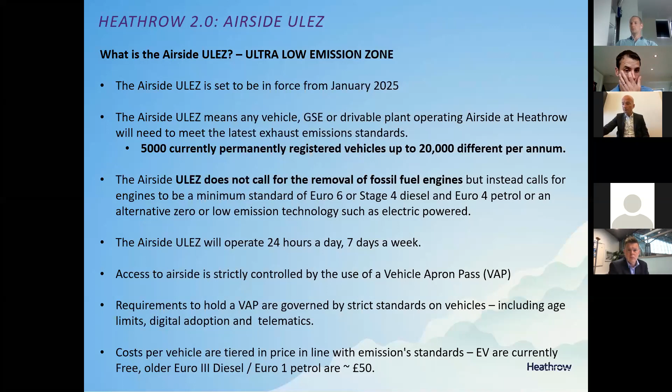For us at Heathrow, even looking at our own fleet, there's such diversity in what we do. We've got 439 of our own vehicles, 60% of which are owned, 40% are leased. And they range, like most airports, everything from a precinct sweeper to a light vehicle to light vans, through to specialised vehicles like de-icing trucks, glycol recovery trucks, rubber removal, as well as the fire service vehicles that we have.

We've been working towards ULEZ and having a target of emissions since the end of 2014, when we first published that we were aiming to have an ultra low emission zone. Part of that drive for us was that our vehicle age limits suggest no vehicle shall enter the airport for the first time over 5 years old, and general vehicles should not be more than 10 years old when at the airport.

There are some exceptions for very specialised pieces of kit, which can go up to 15 years. So generally, the 10-year lead into ULEZ was going to give all of our service providers and partners the opportunity to rethink their fleet strategies, so that when we got towards 2025, their replacement strategies enabled them to be ULEZ compliant in advance, rather than waiting for the last minute for big investment decisions.

From a Heathrow perspective, out of the 439 vehicles, 164 are planned to be switched to electric or hybrid by the end of 2020. These are supported by 108 electric vehicle points and 20 advanced charging units as well.

This still leaves a big challenge of 275 vehicles that are currently not ULEZ or fully ULEZ compliant electric vehicles. Of those 275, a predominance are our specialised kit, such as HGVs, snow equipment, fire vehicles. But like in the industry, we've been having long discussions with a lot of our partners and suppliers, such as Vestergaard, about how we can introduce cleaner vehicles and electric vehicles into our fleet of airports. We really recognise the development costs this has for our supply chain in manufacturing and developing these vehicles in the first instance.

As well, there's the cost for vehicles not owned by Heathrow - how much it costs for our stakeholders, partners, service providers and ground handlers to actually purchase this equipment. So 275 vehicles is our remaining challenge. Good news for us, 178 of those do comply with the actual ULEZ standard, meeting the Euro 6 for diesel or Euro 4 for petrol standards already. So really the big challenge out of our 440 vehicles is trying to find a solution for the remaining 100 vehicles.

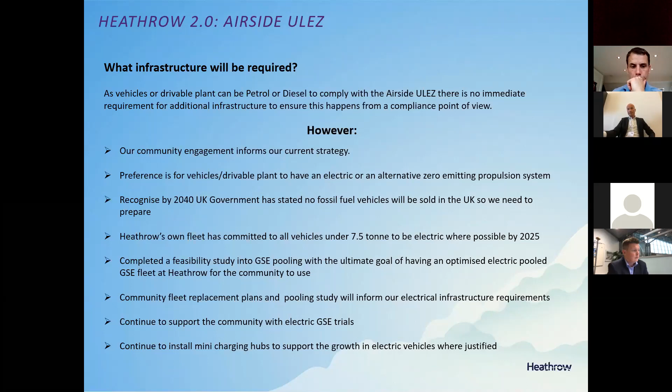So for us, what are going to be the challenges as we move towards 2025? Five years ago, when ULEZ was 10 years away, it seemed a really long time, and now, five years on, the horizon seems to be coming at a more rapid pace. I think personnel and airside operators are changing very quickly, and we need to maintain regular communication as the whole network of suppliers, service providers and personnel changes at the Heathrow environment.

The physical equipment, the electric vehicles and GSE, is rapidly evolving, and installing infrastructure to support the trials is a really complex process requiring funding approval, power availability, underground surveys and construction lead time. Heathrow is not a greenfield site like many airports, so it's not simply a case of finding the electric charging unit, putting it above ground and plugging into it. Frequently, the general supply of power is going to be a challenge. So some outlooks suggest it's going to be tens and tens and tens of millions of pounds just to supply sufficient electrical infrastructure to power enough units to deliver this.

Lifetime costs are really challenging. Most electric GSE is currently more expensive than the fossil fuel equivalent - sometimes you can pay double the cost for an electric vehicle compared to the fossil fuel equipment. However, running costs remain in favour, with diesel being cheaper than electric. So making sure funding is available when looking at replacement costs, especially with current liquidity issues across all businesses, choosing a vehicle that's 50% more expensive than another for practically the same function is going to be a tough thing to do.

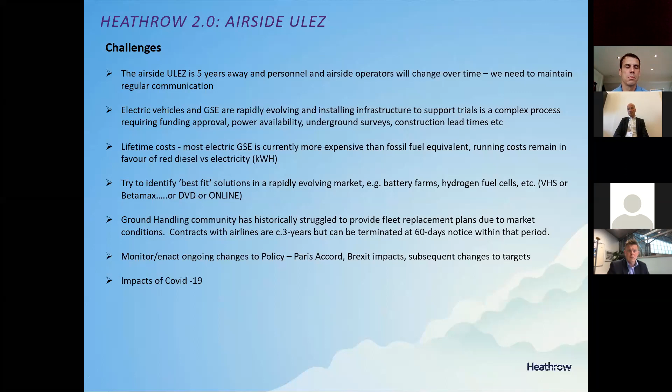There's not one person currently in the aviation market that has escaped the impacts of COVID-19. With many airports operating at less than 20%, 10%, some even 0% of their normal capacity, they're really struggling to generate the income to keep them as a liquid, viable business. For them to try and generate the right revenues to stay afloat, let alone get replacement vehicles, let alone those that are potentially more expensive, is a really, really challenging market. So it's continue to watch this space.

Data is a big thing for us in how we are going to achieve ULEZ. In order to obtain vehicle apron passes, people do have to apply. Until last year, whilst we did have an electronic database of all vehicles, we had no way of accurately generating where we were in terms of compliance for ULEZ, not just for ourselves, but also the whole market in terms of the supply chain and every single one of those 5,000 vehicles that needs to have a vehicle apron pass. Likewise, we had no direct data on when we were expecting the vehicles to be replaced according to our age restrictions.

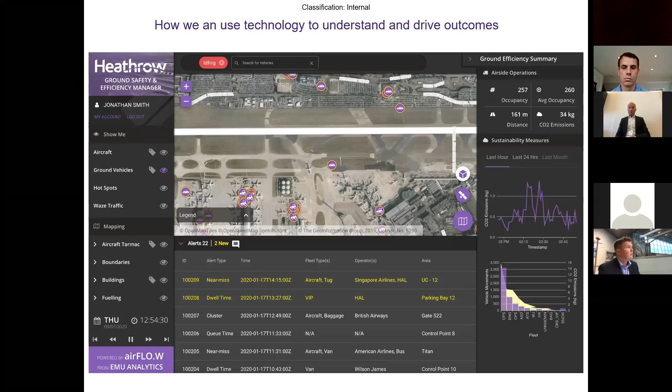And just as a sign out for me, in terms of the summary of how we're going to achieve the ULEZ - data from an internal perspective is going to be key and has been key for us. Gathering the data from telematics, looking at the detail within our vehicle apron pass ID gateway systems, and drawing upon all those other data and dash cam technologies to provide as much data as we can. Using that data, turning it into real information to understand what the uses are.

Making a reduction, first of all, making a big reduction on the journeys we're making, seeing how we can turn that information into making sure vehicles aren't idling, and incorporating that data into strategies to drive down the use of those vehicles.

From an external perspective, we engage. We make sure we speak to our stakeholders, our service partners, and our suppliers to understand their current status and keep on top of discussions about their strategies for replacing fleet vehicles with greener equivalents, understanding how we as an airport authority can help them achieve that, including infrastructure and budget requirements.

We continue to look at the broader data strategy to see where that makes a difference. At Heathrow we also look at a volume of joint forums, working with external forums such as this one. We also have our own clean vehicle partnership and center of excellence, pulling in the lead people accountable in each organisation to get senior sponsorship for joint initiatives and joint funding for implementing efficient decisions at Heathrow.

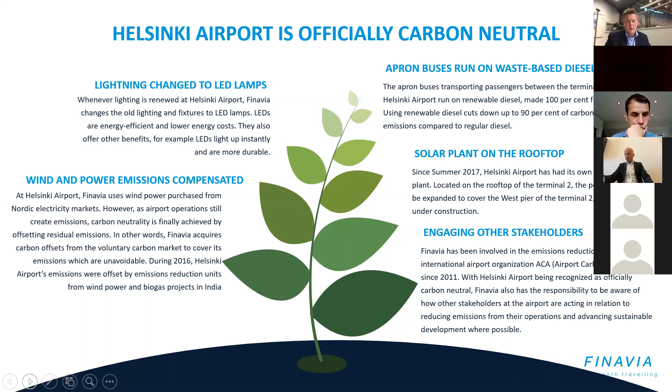Oh, we went 1 to 4. Let's roll back.

I just try to brainstorm how the airport can help the stakeholders, such as ground handling companies and other companies - catering, cleaning, maintenance - go there, so enabling the environmental initiatives. We should be clear on the communications and goal setting, creating an environment with the proper aspirations for how we want to drive the desired change. Directly linked to that is to research together and find the low-hanging fruits, and maybe not so low-hanging fruits, where emissions could be cut, and establish ambitious but realistic plans for short and long-term initiatives.

Planning the infrastructure is usually driven by the airport, but we shouldn't forget the stakeholders. At least here in Helsinki Airport, we try to listen closely to the requirements, desires and wishes of the stakeholders - where they are going and what kind of equipment they are going to have in the near future.

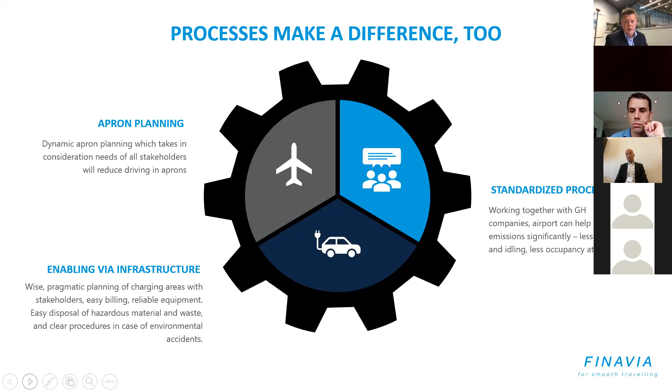We at Vestergaard are also seeing a huge impact of this COVID-19, and part of what we are looking at as a positive, if we need to see light at the end of the tunnel, is to go sustainability. So we're focusing basically all of our efforts on sustainability and the green agenda.

We see, if you look at this, what we call completing the cycle. We spray, but then we're able to recover, recycle, transport it back to where we need it, in-truck manufacture if we want, and then we can spray it again. So basically the idea of spraying on Monday, picking it up, recycling, and spraying it again on Friday. So we are trying to tap into some of this idea that both Neil and Yanni have talked about so far. How can we as a supplier be part of that?

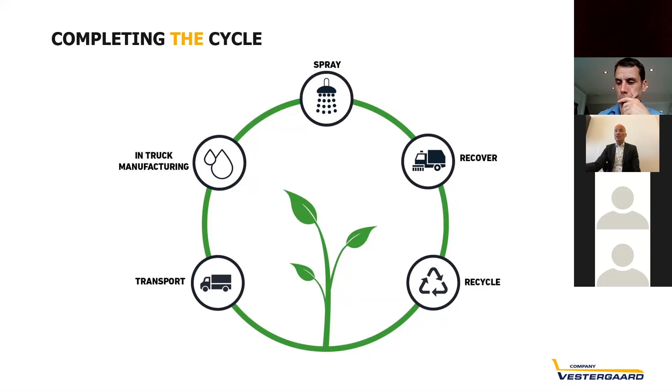So if we go to my next slide, Alice, then Vestergaard has actually set up what we feel are rather ambitious goals in our own corporate social responsibility. We want to go zero incident by 2030.

And zero incident really means everything from small accidents - people should not be injured while at work in an airport. We should have no trucks or vehicles running into each other. We should have no trucks running into aircraft. We should have no aircraft having incidents. And that also goes into some of the technology that we still at this point do not even know, like ice detection or contamination detection. Once we have that, we can go automation, robotic. Then we think we are in a totally different way than the type of operation we're doing today.

And then the other angle of our CSR is carbon neutral ground handling by 2030. So that's just over nine years away that we want to be totally fossil free. We already have several initiatives going right now that are part of this, but from now until 2030, we aim to go all the way on that.

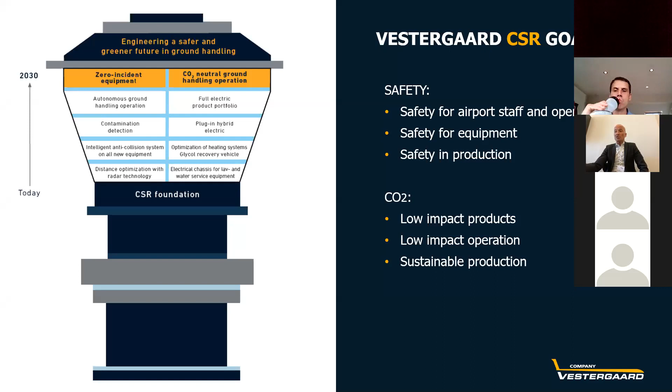Some of the first parts that we have done - Alice, please switch again - is to take our big Beta de-icer and turn it into, at this point, a hybrid electric de-icer.

It started out just being called hybrid because it's basically a Volvo that has a generator, then a battery. But particularly for the Chinese market, they want electric only. So now it's an electric de-icer with a range extender, and the range extender at this point happens to be a Volvo engine.

With this, you can actually drive around the aircraft. You can de-ice up to 15, 20 aircraft. So I'm tapping into this - no idling, no equipment standing around emitting on the apron or in the airport as such.

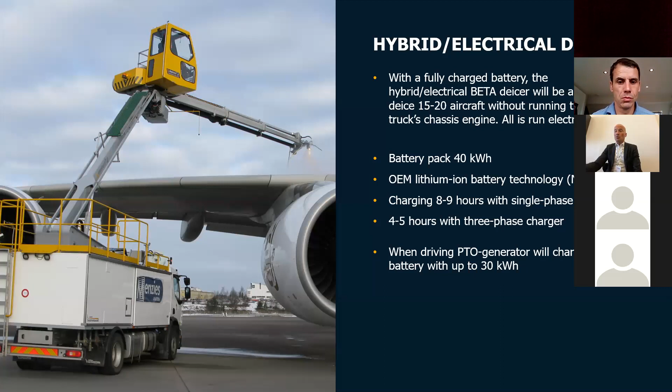We have developed our own electrical chassis for water and lavatory trucks, and later this will become for all kinds of service vehicles. So again, tapping into what you said, Neil, all vehicles under 7.5 tons should be this. We're actually aiming to build our own 16-ton chassis, all electric, so that we take away a lot of the fossil equipment that's out there today and make it electric.

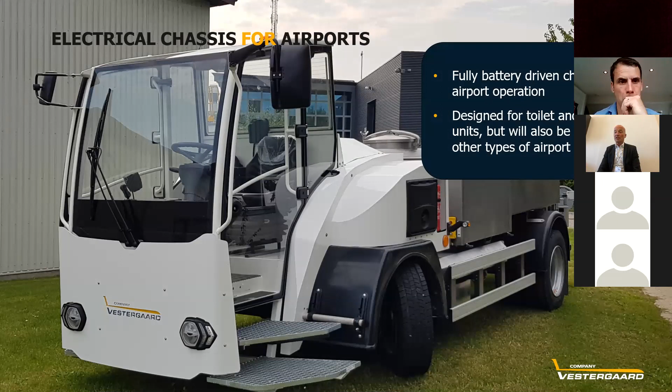And here's a new glycol recovery vehicle. This is still, at this point, a diesel-driven equipment because it has a 12-ton hopper in there, so it takes a little while before we can go electric. But we aim to do this electric as well. So this is part of the cycle that we showed, that we can spray one day and recover it and put it into a recycling plant.

One of our big customers in the US has just bought a few of these because there is now a big project in Cleveland where they recover everything and have put in a recycling plant right there. So we see that this is a big part of the sustainability as well, to take away anything that is harmful to the environment, that leaves a carbon footprint.

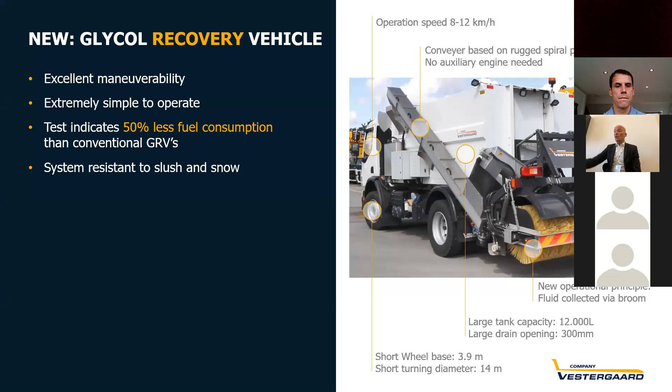Just one last slide, and then I'm almost done. We can actually do what we call in-truck manufacturing. That's by taking this recycled glycol, or it could be raw glycol from the start, and actually make it into aircraft de-icing fluid right in the truck itself. That would save us from trucking it all over the country or countries. So we're looking at, are there any technologies, ways where we can save CO2, save the environment, and make it smarter for the operators.

So the big thing here is, I don't know if it was Yanni or Neil who said that typically electric equipment is twice as expensive. We actually look at it that it is slightly more expensive. The equipment that we're putting out is only slightly more expensive to purchase, but it's a lot cheaper to operate, and the maintenance is a lot less on this equipment. There are actually fewer moving parts. The electro drives are a part, equipment that's been around for ages, so it's a lot easier and simpler to maintain.

I heard somewhere in the US they're talking about automobile repair shops laying off people because people drive more and more electric cars - there's nothing there to do. So we see this whole sustainability agenda, it used to be license to grow, now I guess we call it license to operate. So when we hopefully get back in some kind of shape after this crisis, we are there to help with green initiatives to overcome this.

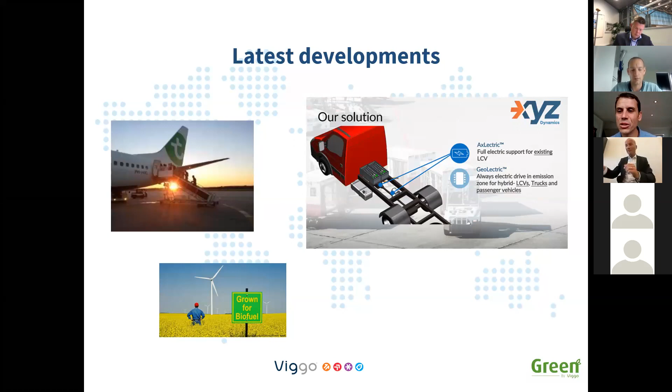Jelma, I'm going to launch a couple of our poll questions to the audience in a sec, but just picking up on, obviously you're very proactive in this field and doing a lot of work in adopting more sustainable equipment and practice. What's the reaction from airline customers, and how effective is it in winning new business? Is this something your customers are switched on to, and is it proving something that will open doors?

I believe so. Thumbs up if you can hear me, Max. Okay, good. In all honesty, yes, it is nowadays. It's in all tender documents, and you have to greenify, but at the same time, it's not allowed to cost a penny more. So, which is doable.

So it is. I think last time you also mentioned that it's not an order winner anymore, it's basically an order qualifier. And with the right volume, then it doesn't have to cost more. But unfortunately, that is a requirement. So if you want the world, but don't have the volume, then it's usually more expensive. But I think in a couple of years, it won't even be an order qualifier anymore.